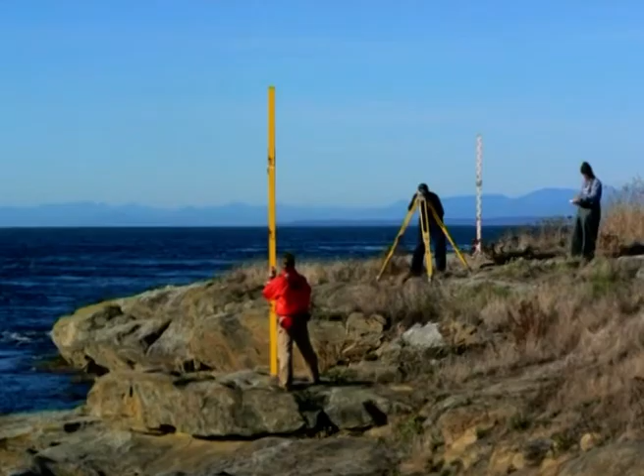Today let us discuss surveying. Knowing about the relative position of various objects, determination of distances between them, measurement of angles, measurement of height, determination of boundaries and relative heights of various points come under the purview of surveying.

It is very essential to mark the various points on the land boundary lines of the proposed construction sites and levels, that are heights of the various locations, before starting the construction of building, bridge, embankment, railway line, etc.

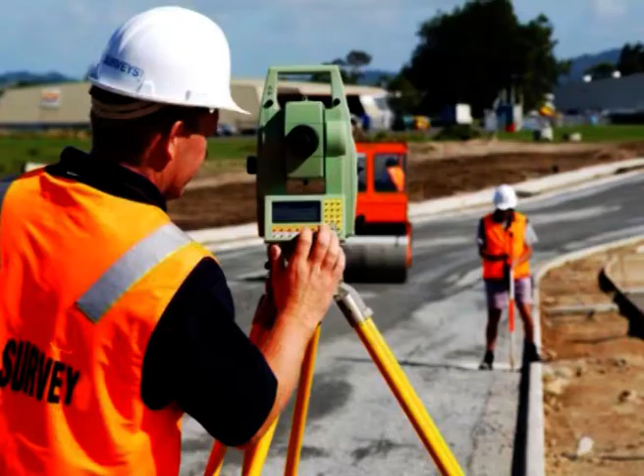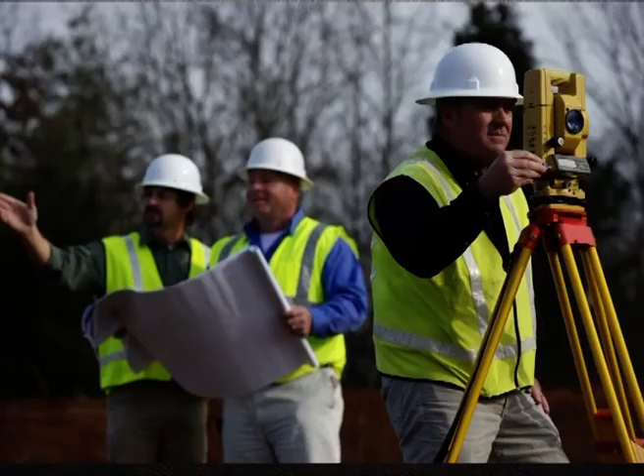After performing the measurements of the shape, size and location of objects on ground, the details are plotted on drawing sheet. After the completion of drawing, which may be one or more than one, describing the details, the construction process is started. After determining the details of the soil strata below ground and bearing capacity of soil, which is called geotechnical survey, the depth of earthwork is decided by the engineer. All these things are interrelated and form the part of the total survey network.

At first sight, the job of survey looks very simple, but it actually requires special knowledge about it and the understanding of the job. The students who have studied or who have the knowledge of mathematics and physics can acquire the knowledge about survey in a nice manner. The pace of development which is going on in India and throughout the world has increased the importance of survey related works.

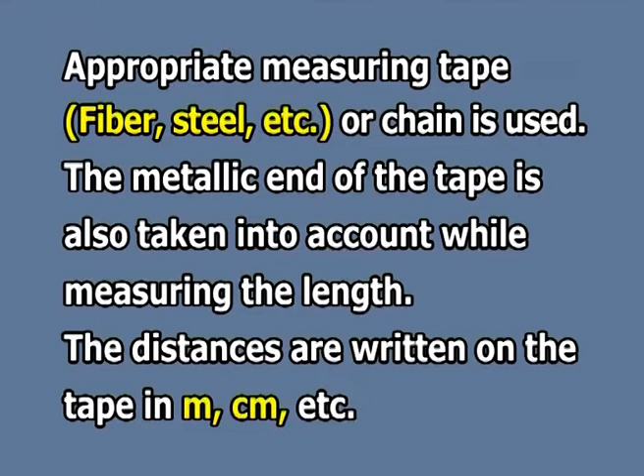Now, how to make the measurement, especially the length? Appropriate measuring tape, that is fiber, steel, etc., or chain is used for this purpose. The metallic end of the tape is also taken into account while measuring the length. The distances are written on the tape in meters, centimeters, etc.

Now, let us see what are the types of surveying we can carry out. The types of surveying which are extensively being conducted are many. Example, contour surveys, land survey, city survey, topographical survey, route survey, mine survey, engineering survey, satellite imagery based surveys, geological survey, construction surveys, soil surveys, etc.

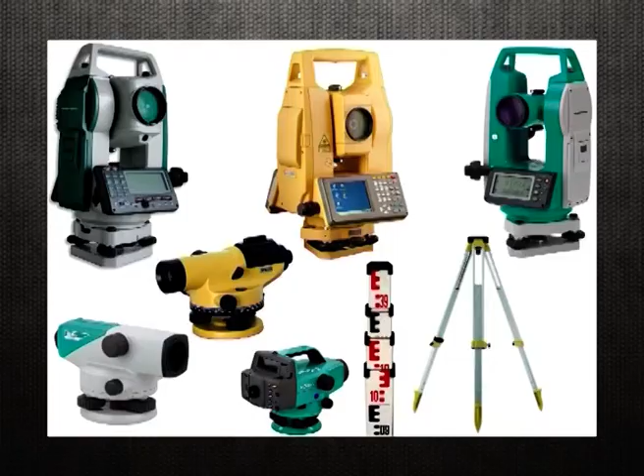Now, let us discuss dumpy level and plane table surveying. A dumpy level, also called builder's auto level, which is a leveling instrument, or automatic level, is an optical instrument used to establish or check points in the same horizontal plane. It is used in surveying and building to transfer, measure or set horizontal levels. In 1832, English civil engineer William Gravatt devised the more transportable and easier to use dumpy level.

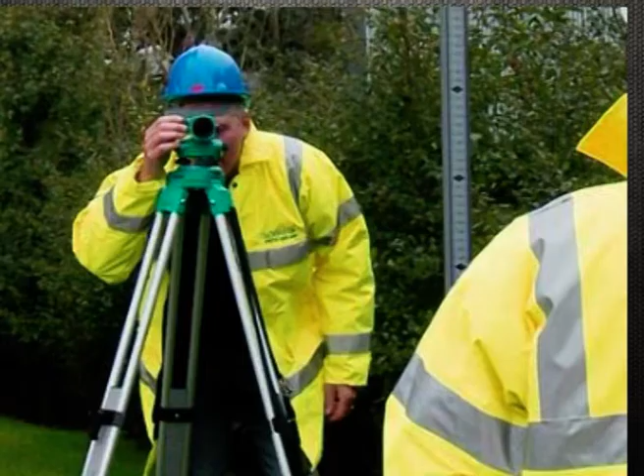And how can it be operated? The level instrument is set up on a tripod and, depending on the type, either roughly or accurately set to a leveled condition using foot screws that are called leveling screws. The operator looks through the eyepiece of the telescope while an assistant holds a tape measure or graduated staff vertical at the point under measurement.

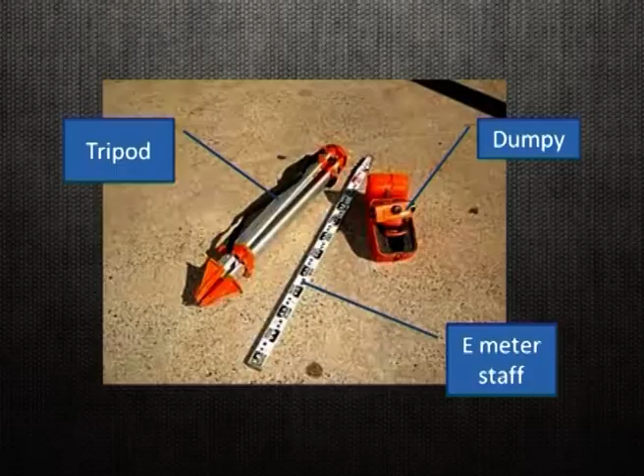The instrument and staff are used to gather and transfer elevations during site surveys or building construction. Measurement generally starts from a benchmark with the known height determined by a previous survey or an arbitrary point with an assumed height. The term dumpy level endures despite the evolution in design. A dumpy level is an older style instrument that requires skilled use to set accurately.

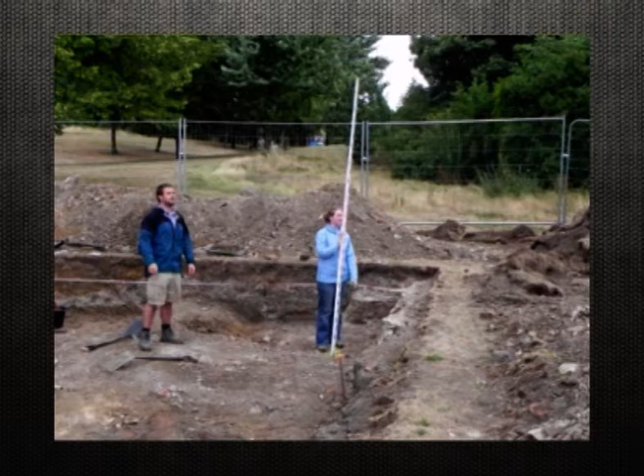The instrument requires to be set level, that is spirit level, in each quadrant to ensure it is accurate through a full 360 degree traverse. Some dumpy levels will have a bubble level ensuring an accurate level. A variation on the dumpy, and one that was often used by surveyors where greater accuracy and error checking was required, is a tilting level.

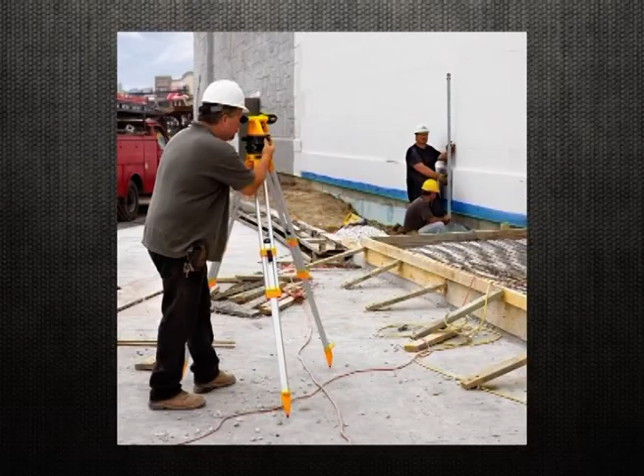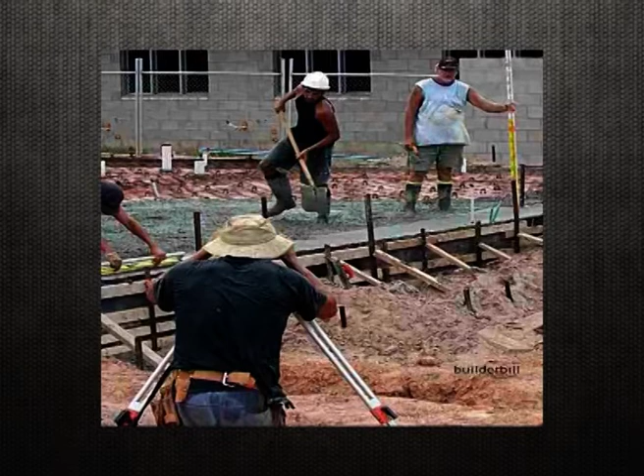This instrument allows the telescope to be effectively flipped through 180 degrees without rotating the head. The telescope is hinged to one side of the instrument's axis. Flipping it involves lifting to the other side of the central axis, thereby inverting the telescope. This action effectively cancels out any errors introduced by poor setup procedures or errors in the instrument's adjustment. As an example, the identical effect can be had with a standard builder's level by rotating it through 180 degrees and comparing the difference between spirit level bubble positions.

An automatic level, self-leveling level or builder's auto level includes an internal compensator mechanism, that is a swinging prism that, when set close to level, automatically removes any remaining variation from level. This reduces the need to set the instrument truly level as with a dumpy or tilting level. Self-leveling instruments are the preferred instruments on building sites, construction and surveying due to ease of use and rapid setup time.

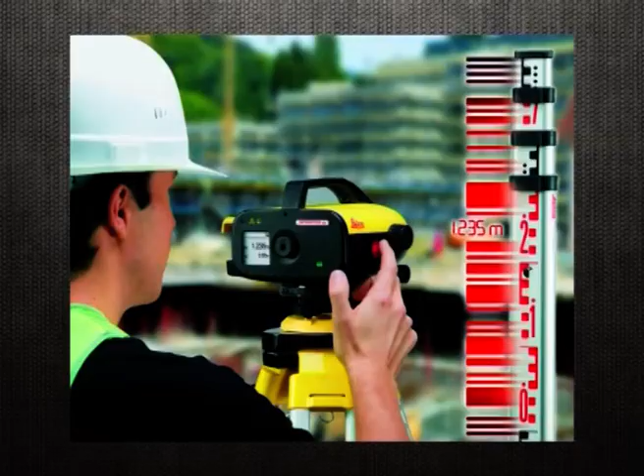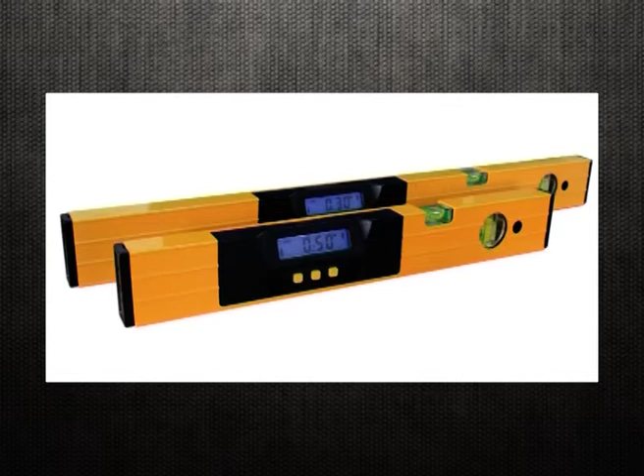A digital electronic level is also set level on a tripod and reads a bar-coded staff using electronic laser methods. The height of the staff where the level beam crosses the staff is shown on a digital display. This type of level removes interpolation of graduation by a person, thus removing a source of error and increasing accuracy. During night time, the dumpy level is used in conjunction with an auto cross laser for accurate scale readings.

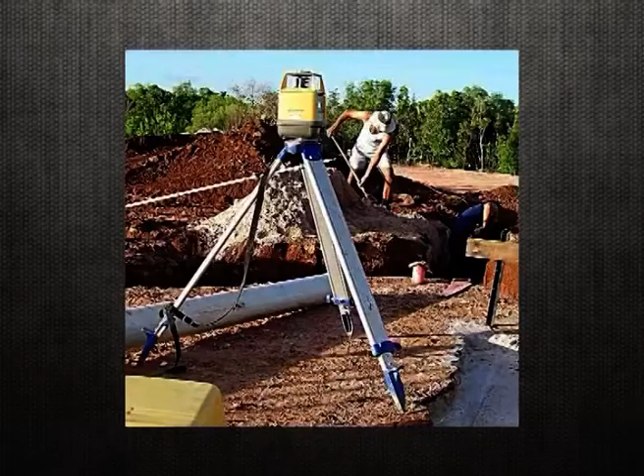More modern types of dumpy levels are still used by builders and contractors, but have been largely superseded for survey work. Before the introduction of digital levels with electro-optical staff readings in the 1990s, a more common type of level was the automatic level, which is constructed in a manner similar to the dumpy level, in that the telescope is rigidly fixed to the vertical axis of rotation. However, the difference between the two is that automatic levels feature an optical mechanical compensator suspended under gravity, which automatically adjusts the line of collimation without the need of a level tube.

A dumpy level is an instrument used to measure, transfer or set horizontal lines. It is an instrument that is often used in surveying buildings. A dumpy level is used to establish relative height, distance and bearings from different parts of a site. Using this instrument requires a certain amount of skill. Setting the instrument is important to make the dumpy level completely horizontal for it to work properly.

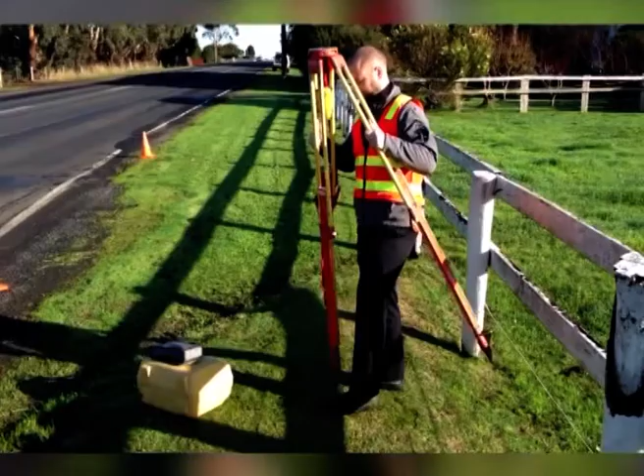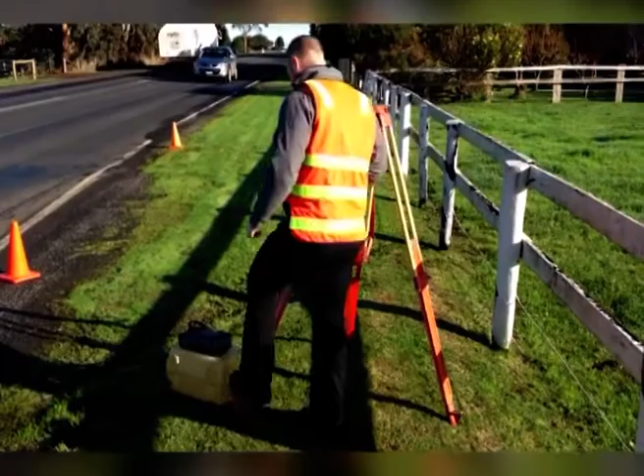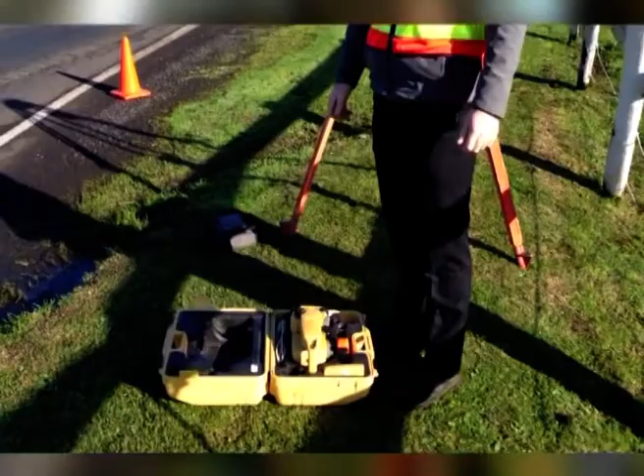Adjust the height of the tripod until it is eye level. Move the legs of the tripod so it is balanced and can hold the level properly. Once you are satisfied, secure the legs of the tripod by pressing it to the ground. Then attach the instrument to the tripod. The level is a very sensitive instrument, so take special care when you handle it. Set the instrument on top of the tripod, and at the center of the tripod is a large screw that you will use to screw in the instrument.

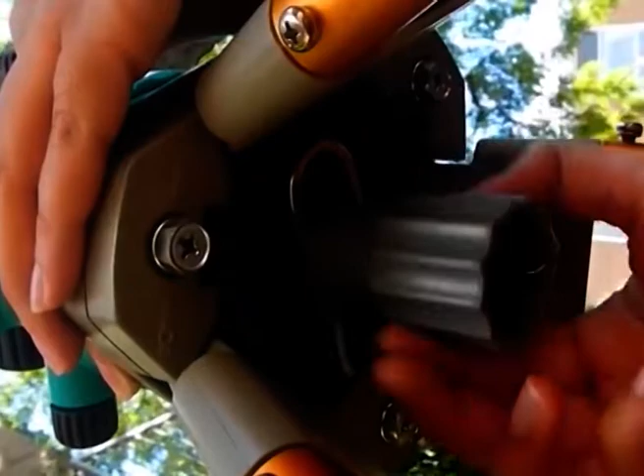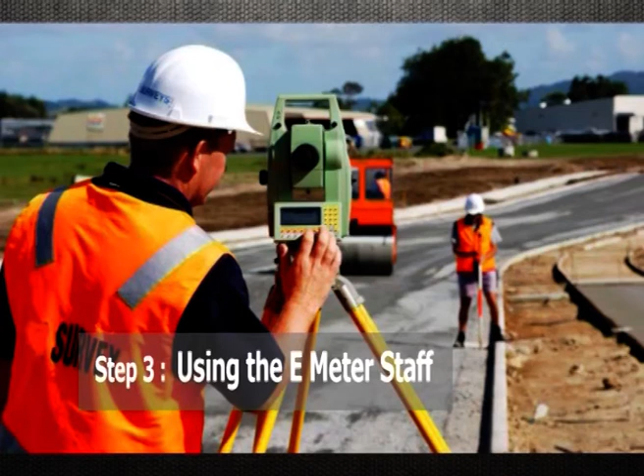On the side of the level is the bubble. Adjust the screws at the bottom of the level until the bubble is at the center of the marker. This is to ensure that the instrument is leveled. Then, using the E-meter staff, once the dumpy level is set, ask your assistant to stand a distance away while holding the E-meter staff.

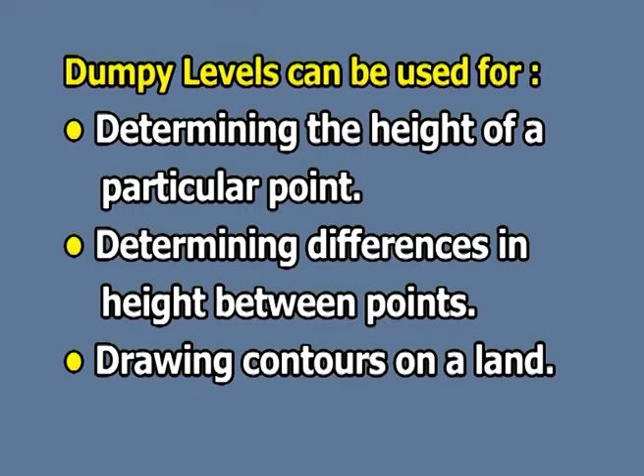Dumpy levels can be used for determining the height of a particular point, determining differences in height between points, drawing contours on a land, providing data to calculate volumes of earthworks, setting out level surfaces for construction, and setting out inclined surfaces for construction. Then, measuring height using the dumpy level.

The place of which height is to be measured is called station. Height is always measured with reference to sea level. Survey of India established benchmarks at several places. Ideally, the distance should be taken from the benchmark. If it is not available, then we can select a point on the map whose distance from sea level is known as the reference. We can fix any suitable point as a temporary benchmark and all heights can be measured from that point. We can fix any temporary benchmark, but if its MSL at the temporary benchmark is not sure, then before starting the surveying, permanent benchmark readings should be clear.

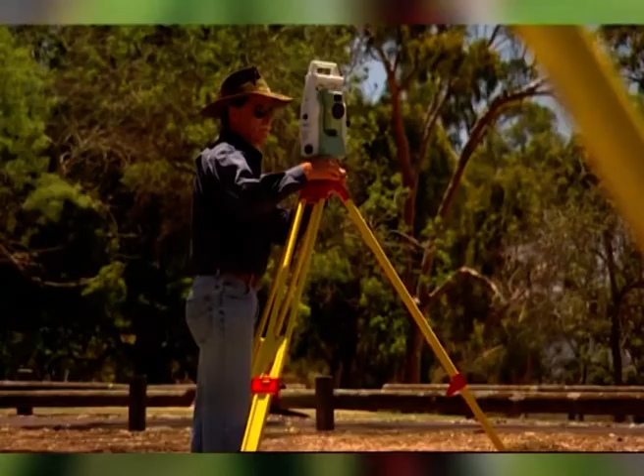The dumpy level is one of the most basic types of optical level instruments. It is used in surveying and building to find elevations, which are known as levels. It can be used to set, measure or transfer horizontal levels. Some surveyors have replaced this older style of instrument with automatic levels, laser levels or other high-tech optical level instruments. One common variation of the dumpy level is the tilting level, which allows for less operator error. Surveying is used to find the height of buildings and earth topography.

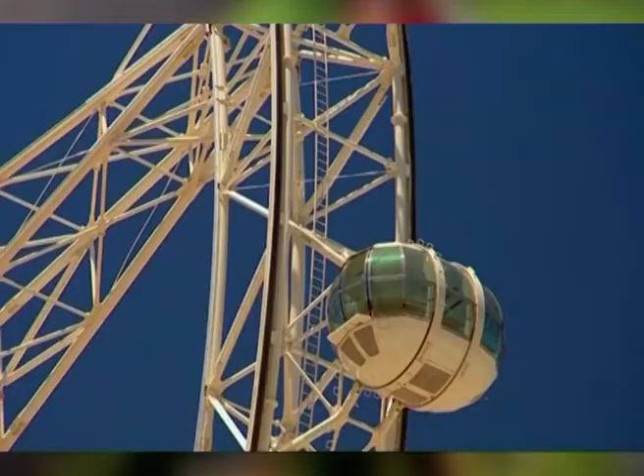This information can be used to make maps, set boundaries and gather information for builders. Measurement generally starts from a benchmark point, the height of which is known from a previous survey. The surveyor may also use an arbitrary point and estimate its height.

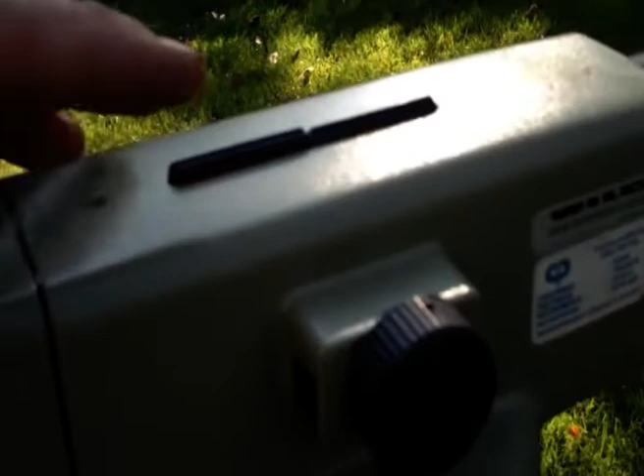The main body of a dumpy level is a telescope that swivels to take 360 degrees of measurement. Magnification power can range from 20 to 30 times. Many have spirit levels, the same kind found in simple construction straight edges, built into the base so the operator can clearly see if the device is level. When the bubble stays in the exact center, no matter how the telescope is rotated, the device is level.

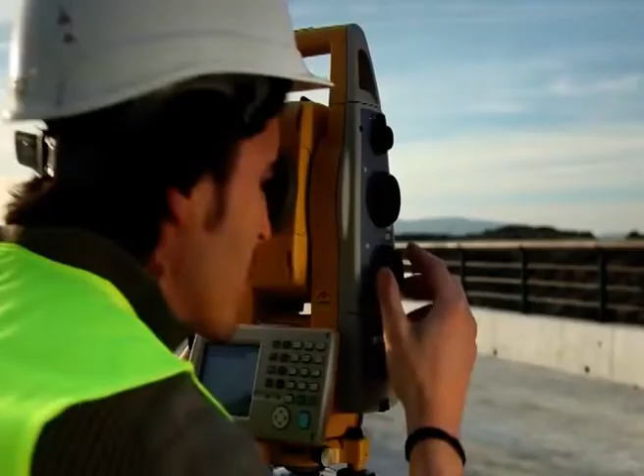4 leveling screws set over a foot plate allow the dumpy level to be minutely adjusted. Each quadrant of the level must be set in order to ensure an accurate reading no matter which direction the telescope is pointed. These levels are mounted on tripods to hold them at eye level and keep them stable during measurements. Finding elevation using a dumpy level takes at least 2 people, an operator and an assistant.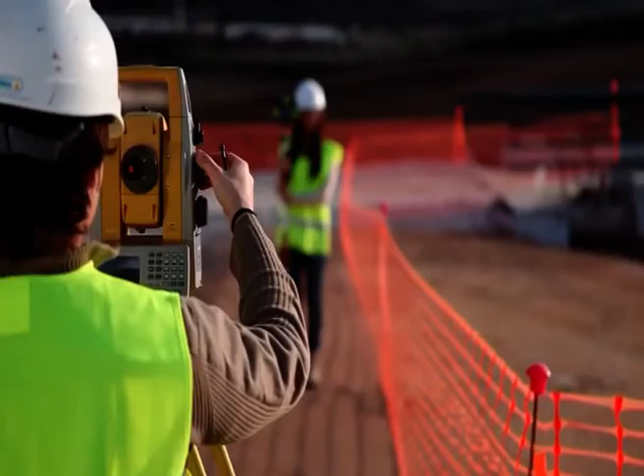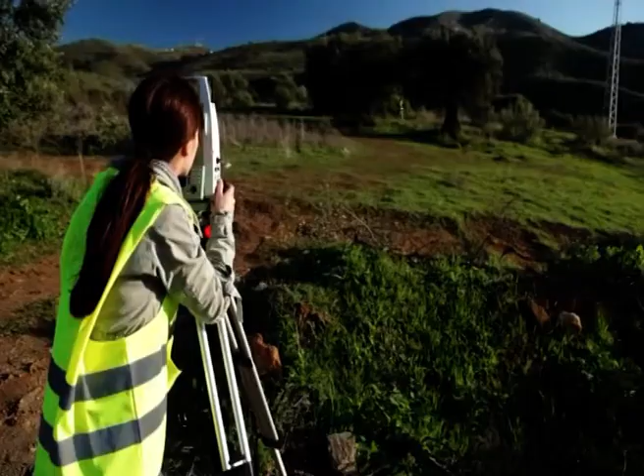The assistant holds a tape measure or marked staff called a leveling rod vertical to the point being measured. Meanwhile, the surveyor looks through the eyepiece at the target and the leveling rod. The operator takes measurements by comparing the marks on the leveling rod to the landscape. Several measurements of the same area can be used to find elevation, distance and other qualities of the landscape.

A tilting level is a type of dumpy level that allows for greater accuracy. Instead of being welded to the level, the telescope is hinged. This allows the eyepiece to be flipped 180 degrees without adjusting the head. As the level needs to be moved less, errors are less likely to occur. Now, let us discuss plane table surveying.

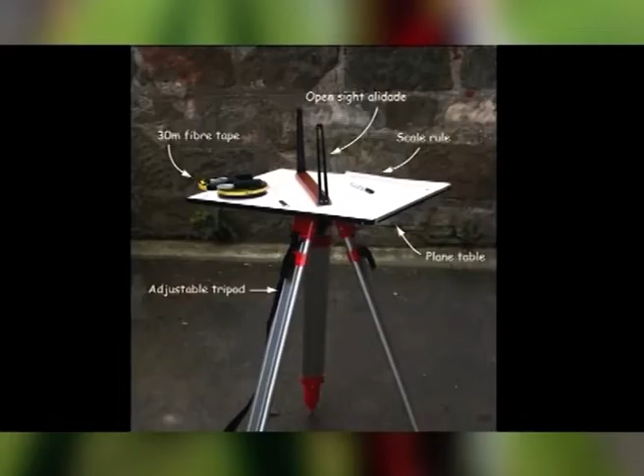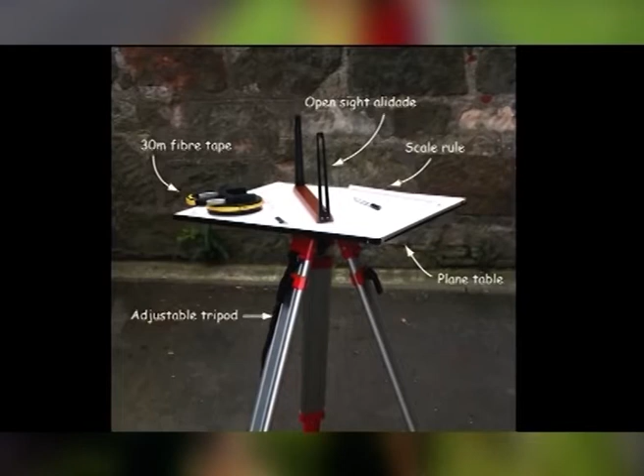A plane table, also popularly called a plain table prior to 1830, is a device used in surveying and related disciplines to provide a solid and level surface on which to make field drawings, charts and maps. The early use of the name plain table reflected its simplicity and plainness rather than its flatness. The plane table became a popular instrument for surveying.

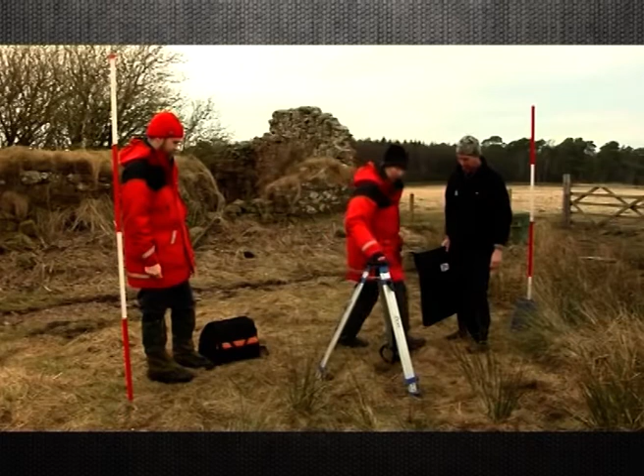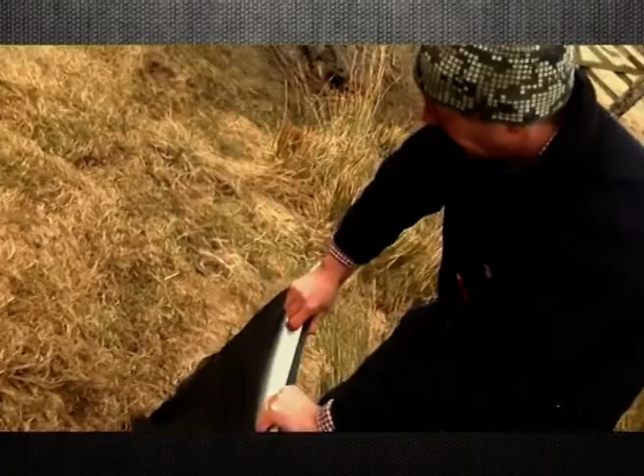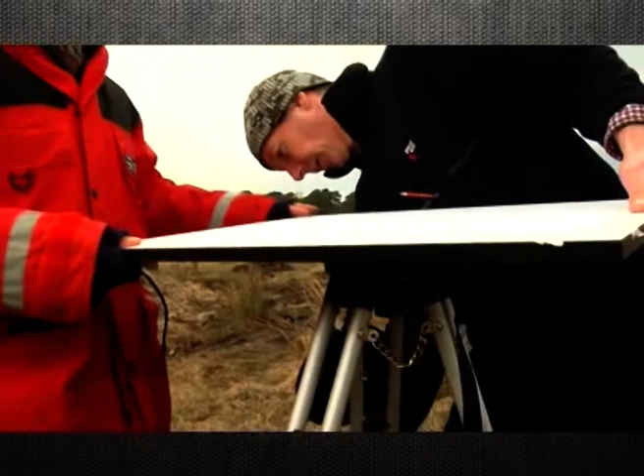A plane table consists of a smooth table surface mounted on a sturdy base. The connection between the table top and the base permits one to level the table precisely using bubble levels in a horizontal plane. The base, a tripod, is designed to support the table over a specific point on land. By adjusting the length of the legs, one can bring the table level regardless of the roughness of the terrain.

The 3-point problem: the method is based on the fact that in a correctly oriented plane table, resectors through well defined points get intersected at a point which represents the location of the plane table station on the drawing. For example, if X, Y and Z are well defined objects present in the field whose plotted positions are small x, y and z, then if the plane table is oriented correctly, the three resectors xX, yY and zZ get intersected at P, which represents the location of the plane table station P on the drawing sheet. Thus, through solution of the 3-point problem, both orientation and resection of the plane table get accomplished simultaneously.

There are several methods for solution of the 3-point problem: trial and error method, mechanical method, graphical method, analytical method and geometrical construction method. Of these, the trial and error method is easy, quick and accurate.

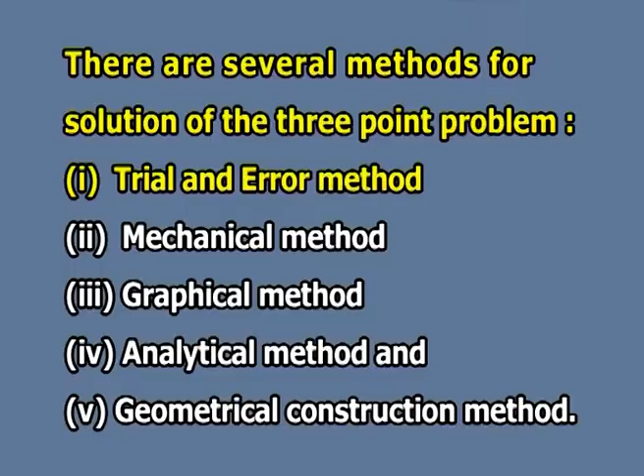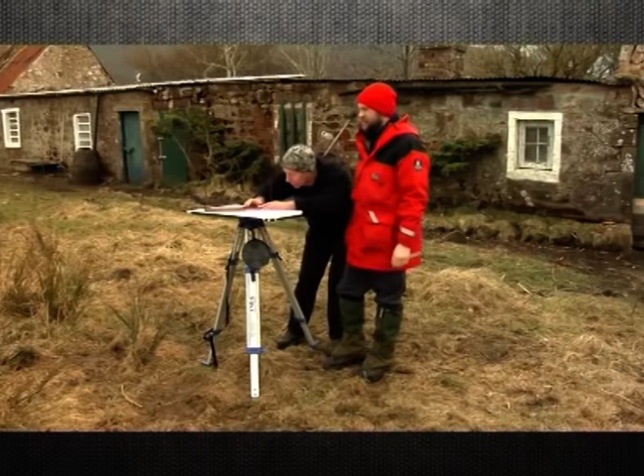It is commonly used in practice and hence has been discussed in detail. Uses of a plane table. In use, a plane table is set over a point and brought to precise horizontal level. A drawing sheet is attached to the surface and an alidade is used to sight objects of interest.

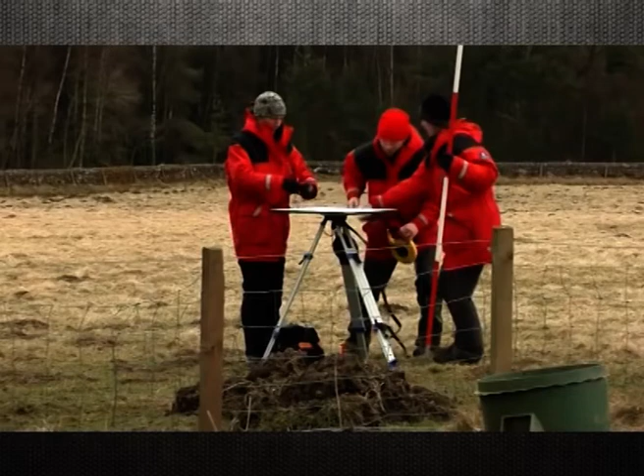The alidade, in modern examples of the instrument a rule with a telescopic sight, can then be used to construct a line on the drawing that is in the direction of the object of interest. By using the alidade as a surveying level, information on the topography of the site can be directly recorded on the drawing as elevations. Distances to the objects can be measured directly or by the use of stadia marks on the telescope of the alidade.

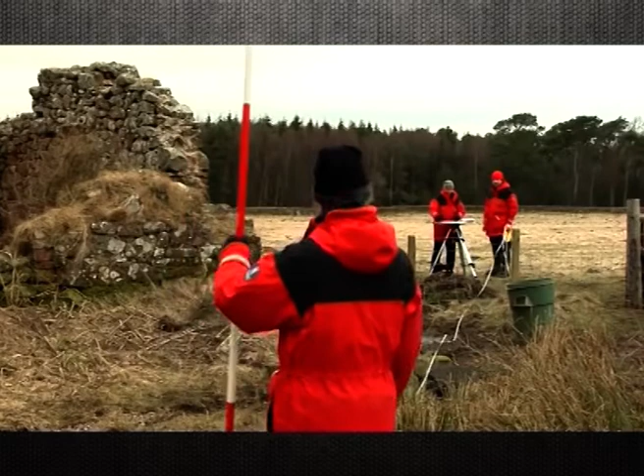Plane table surveying is a graphical method of surveying in which field work and plotting are done simultaneously in the field. The plane table consists of the following: drawing board mounted on a tripod. The board is made up of well seasoned wood and varies in size from 40 centimeter by 30 centimeter to 75 centimeter by 60 centimeter or 50 to 60 centimeter square.

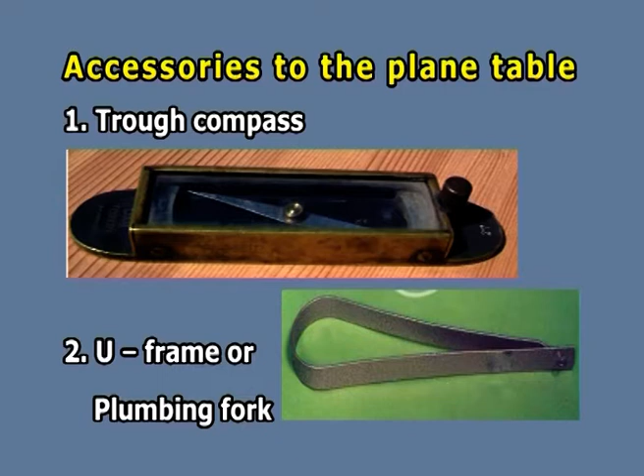Straight edge called an alidade. The alidade consists of a metal or boxwood straight edge or ruler about 50 centimeter long. The beveled edge of the alidade is called the fiducial edge. Accessories to the plane table are trough compass, U frame or plumbing fork, spirit level or level tube, drawing sheet, and pencil or eraser.

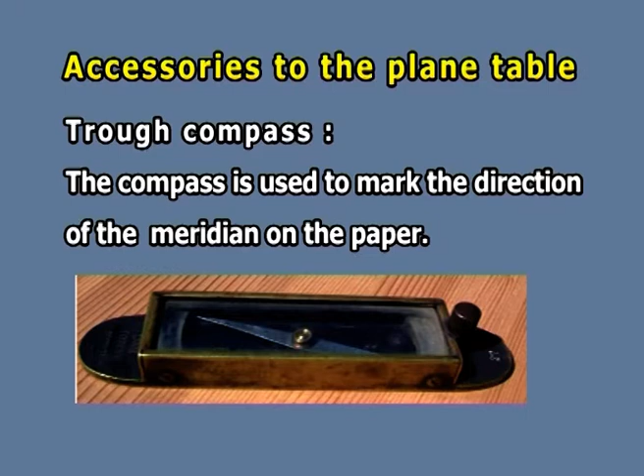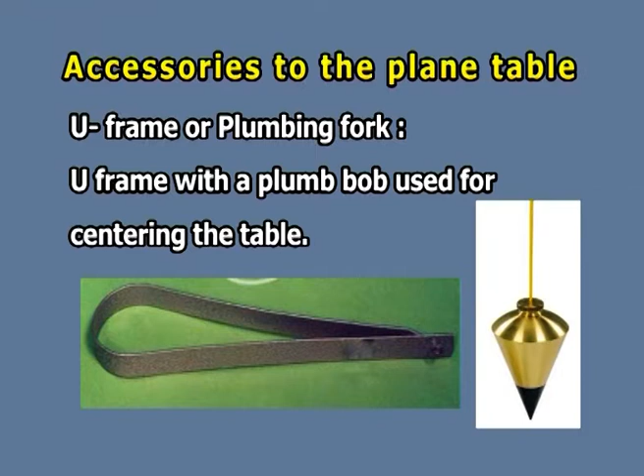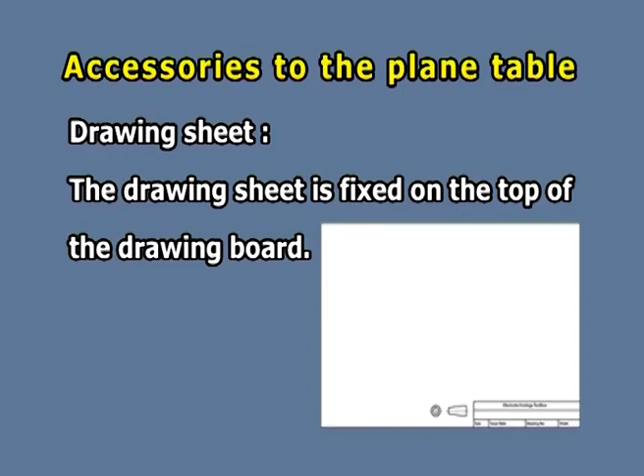The compass is used to mark the direction of the meridian on the paper. U frame or plumbing fork, that is a U frame with a plumb bob, is used for centering the table. Spirit level or level tube is used to level the plane table. Drawing sheets are fixed on the top of the drawing board. Pencil is used for constructing lines and eraser is used for erasing the lines after completion of the plan.

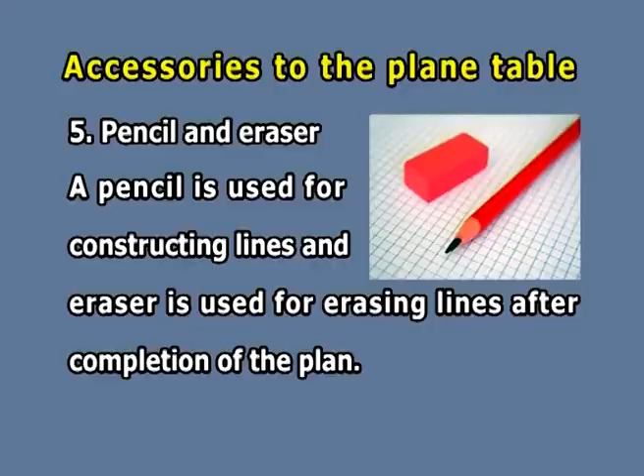Then setting up the plane table. The setting of the plane table includes the following 3 operations: centering the plane table, leveling the plane table, and orientation of the plane table. Centering: the plane table should be set up at a convenient height for working, say about 1 meter. The legs of the tripod should be spread well apart and firmly fixed into the ground. The table should be approximately leveled by tripod legs and judging by the eye.

Then the operation of centering is carried out by means of U frame and a plumb bob. The plane table is exactly placed over the ground station by U frame and plumb bob. Then leveling the plane table. The process of leveling is carried out with the help of level tube. The bubble of level tube is brought to center in 2 directions which are at right angles to each other. This is achieved by moving legs.

Then orienting the table. The process of keeping the plane table always parallel to the position which is occupied at the first station is known as orientation. When the plane table is oriented, the lines on the board are parallel to the lines on the ground. Advantages of plane table surveys are: it is suitable for location of details as well as contouring for large scale maps directly in the field.

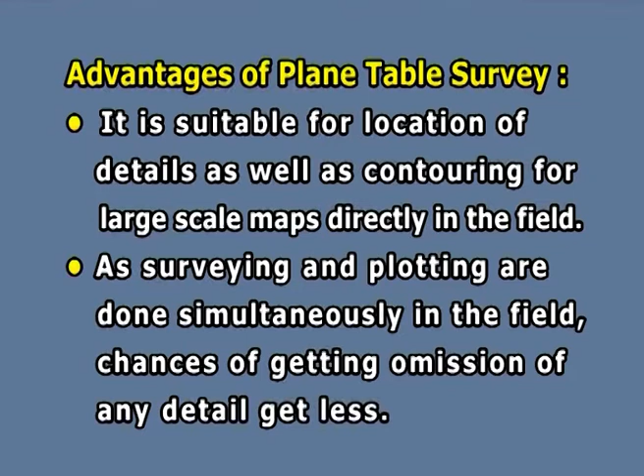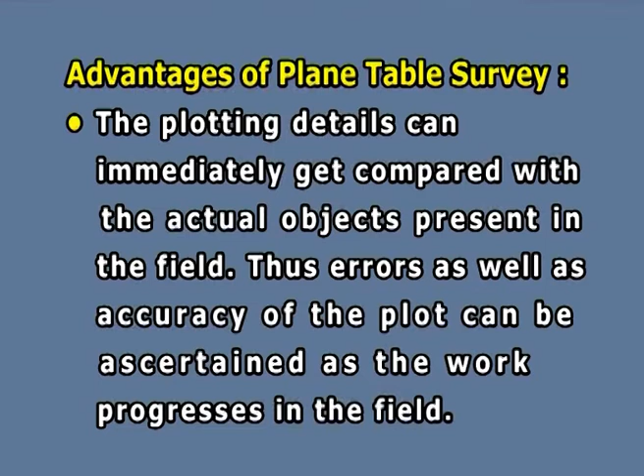As surveying and plotting are done simultaneously in the field, chances of omission of any detail get less. The plotted details can immediately be compared with the actual objects present in the field. Thus, errors as well as accuracy of the plot can be ascertained as the work progresses in the field. Contours and specific features can be represented and checked conveniently as the whole area is in view at the time of plotting. Only relevant details are located because the map is drawn as the survey progresses.

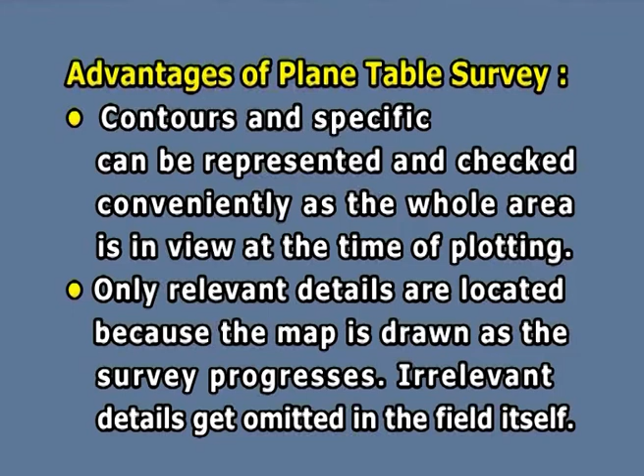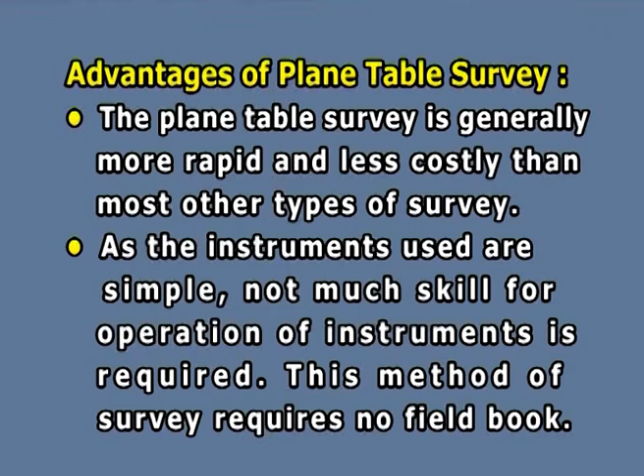Irrelevant details get omitted in the field itself. The plane table survey is generally more rapid and less costly than most other types of survey. As the instruments used are simple, not much skill for operation of instruments is required. This method of survey requires no field book.